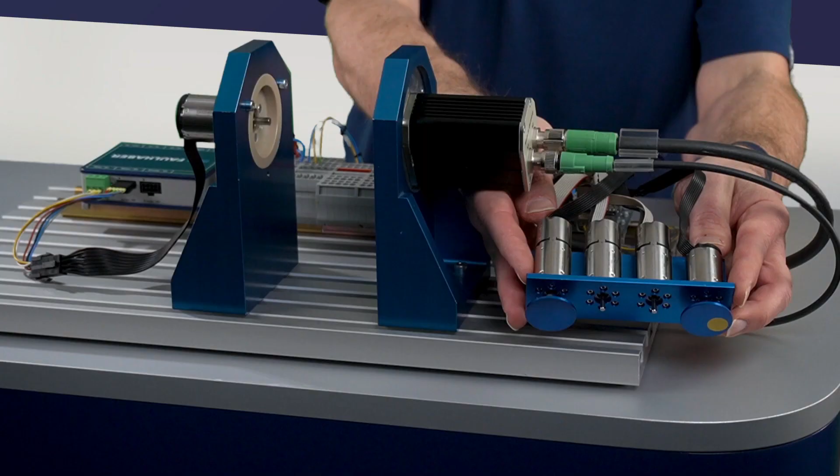In this video, I want to check the influence of different encoder systems to the control loop performance. And to do so, I got different motors. I usually would use the 22mm ones, where we do have the linear Hall or a magnetic incremental encoder or an optical incremental encoder or the Absolut encoder, again magnetic, either single turn or multi-turn.

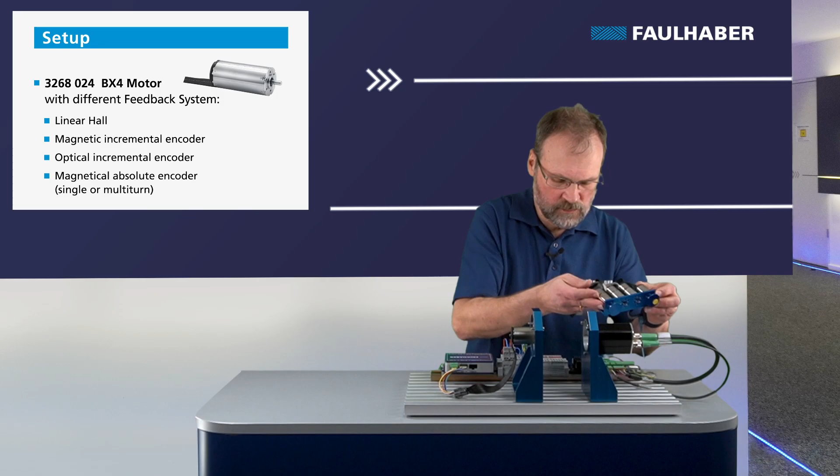But for your benefit, I don't use the small ones, but I'm going to use the big ones here, 32mm diameter, because then it's easier to watch them in the setup here. But reconfiguration here, once again, hooking up all these motors takes some time, so we are going to use some time lapse and cuts in this video to have you concentrating only on the main aspects here.

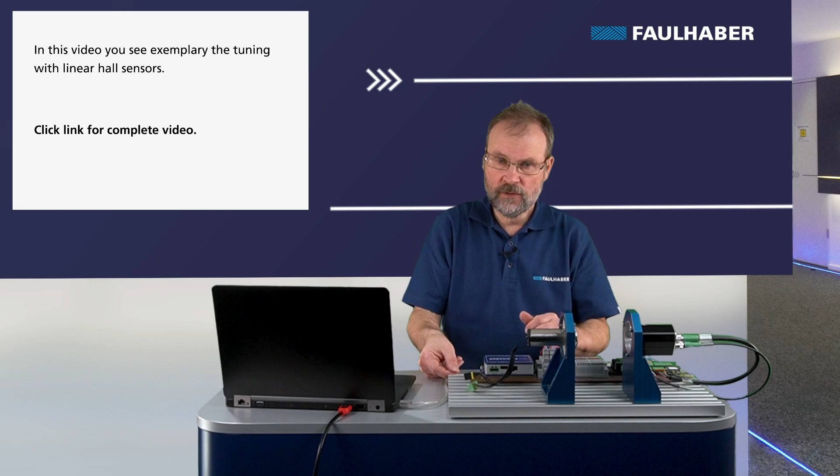In the end, we will see me using the drive configuration window and the tuning window, and then in the end I will summarize the results with a single slide. So let's start this. Let me grab my PC and we can start here. So here with the first one, it's the one having the linear Hall sensors here. Okay, I have to connect it to the motion controller. Only two connectors in that case, and can start configuring.

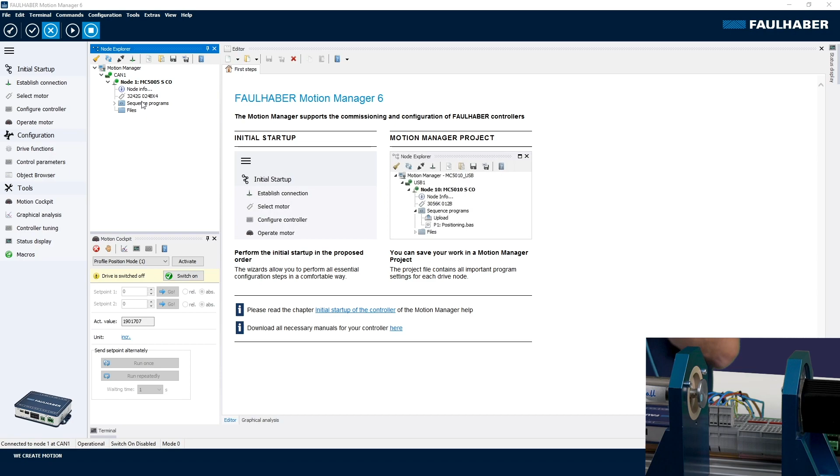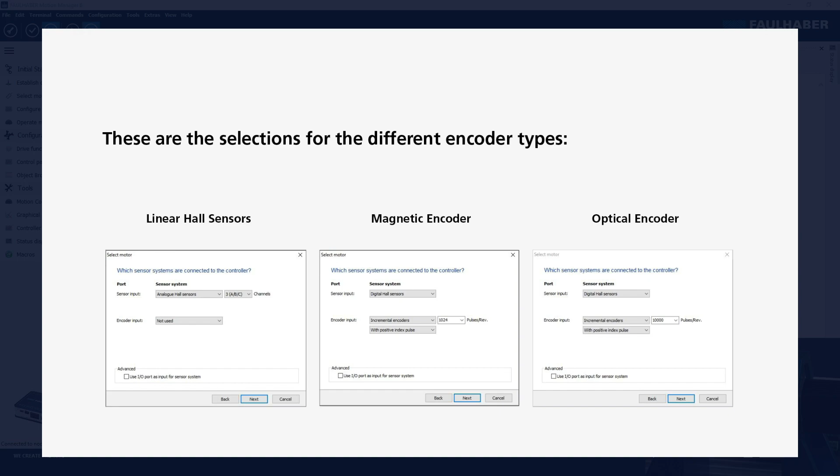And first one, of course, select the motor, and that's still the one that I used in the last videos. So here, that's the bigger one, 3268, and it's a 24-volt execution, and it's having linear Hall sensors as the one in the first videos had. And as I only have the linear ones, these are going to be used for all the loops. Once again, the check for the supply voltage with the threshold, and then transfer the configuration.

And for the linear Halls, there's always the option to adjust the Hall sensor signals, so to teach in the Hall sensor signals to the controller here, and this takes a few moments and is better done without any load connected to the motor. The disk doesn't harm here, but no friction or something like this. And that's a one-time exercise that we have to do to more or less pair the motor and this controller. And then we are done here. I could save the parameters, but I don't have to.

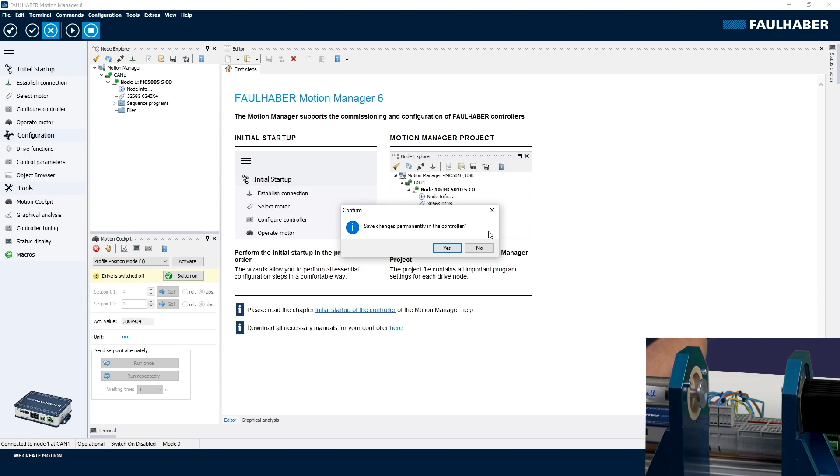And then I'm using the configure controller tool to identify the inertia. I'm doing this once only here in this video, because of course it's always the same motor, same disk, so I can use this value for the next ones too. Use the startup method here. It's a pretty small disk, at least compared to this motor here. Okay, check the result. Yeah, a factor of roughly a little more than the idling motor here.

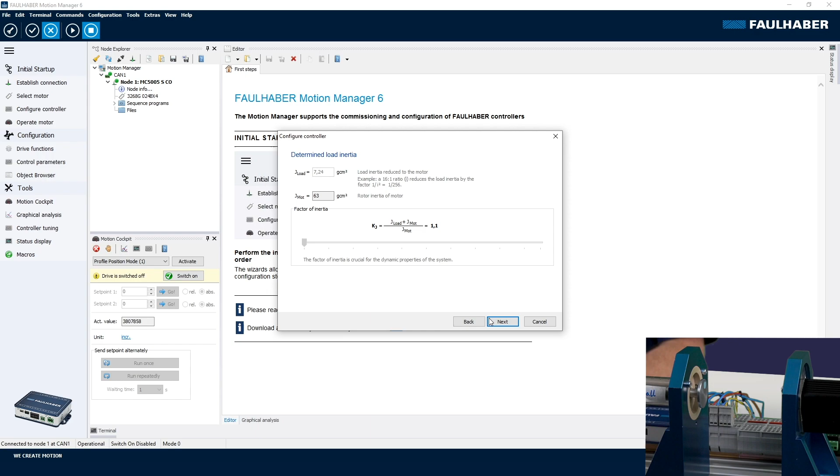And again, transfer the configuration, and that's an important step because now all the control loop parameters are preset for the now identified inertia, and of course for the motors that I selected here. Transfer configuration, and I'm done here. And again, I don't need to change, save it, and then use the controller tuning, and always the same steps here.

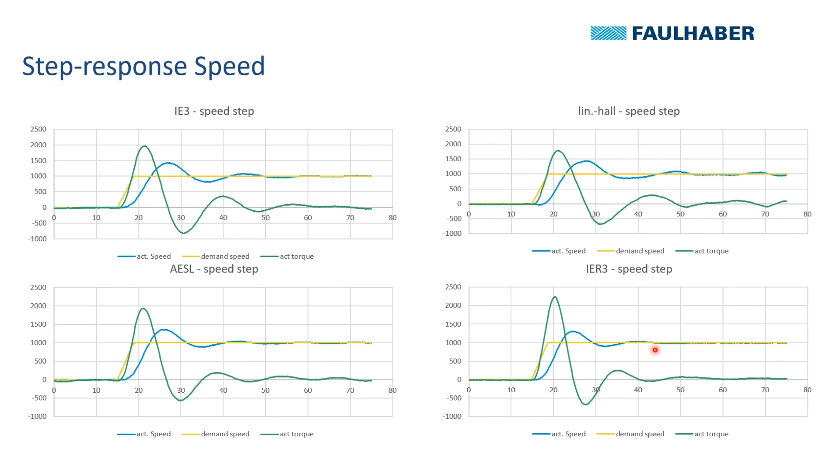And when we compare them, it's very similar. So for position loop, there isn't much difference between the linear Hall and even the optical one, at least while we still use the standard parameters for these motors. The optical does have its benefits because, as I explained, I can increase the gains here and would have better compensation of the disturbance.

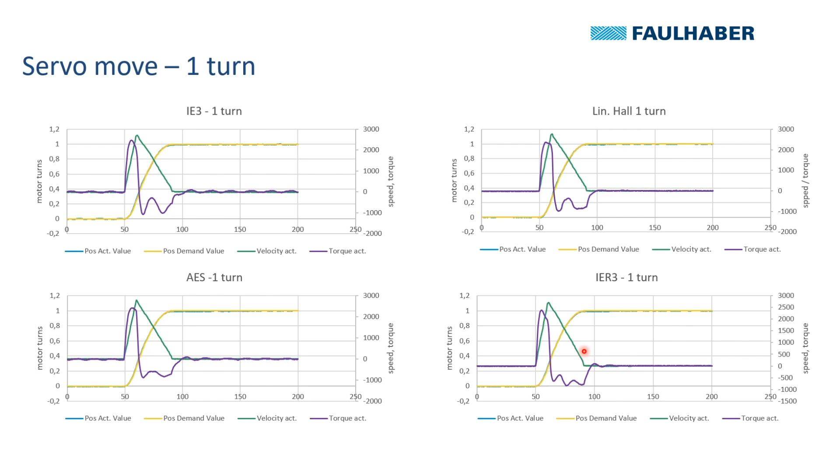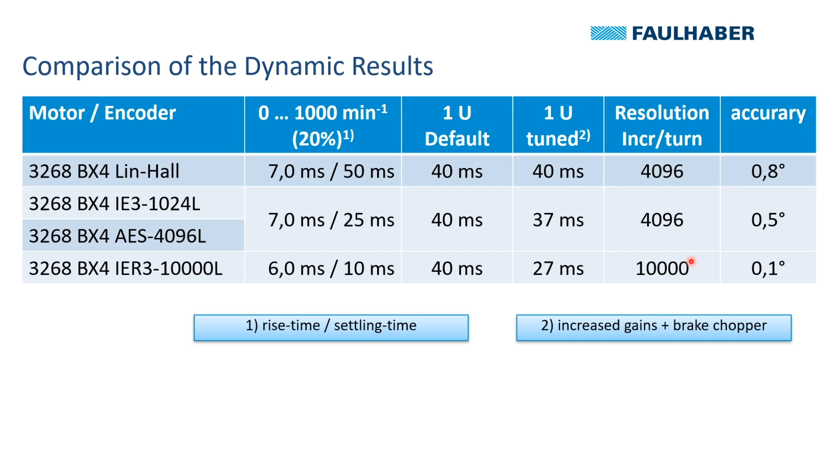For the time per single turn, these ones are pretty similar here. It's the same resolution and similar precision of these encoders here, whereas the optical one with the default settings would use the same time, but it can be tuned due to the higher gain for the parameters and can be pretty fast in such a case, and that's due to the better precision of this encoder. Of course, in that case, gains have been increased and the brake chopper has been used. So far about the influence of different encoder systems in a control loop.